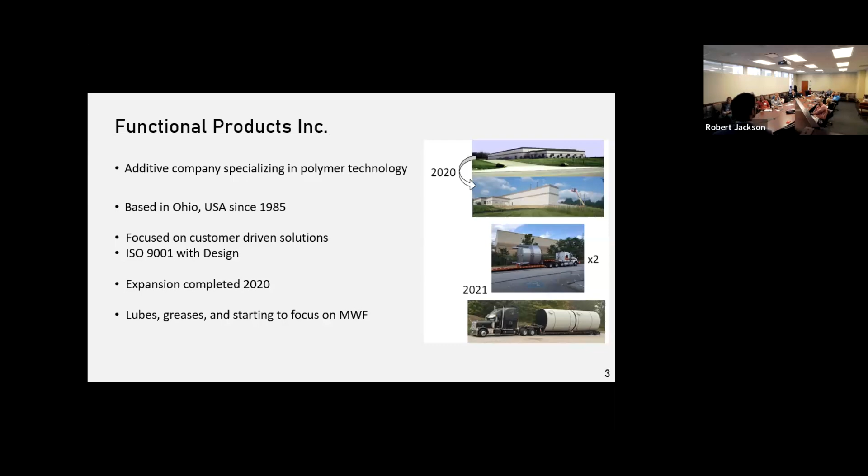So my career: when you go to a conference like ILMA and you have networking discussions, one of the big questions is how did you get into this? Auburn, as we've established, is the only tribology minor, the only place where you can really go and study tribology and have a reason for being in lubricants. A lot of people end up in this industry from family businesses, from happenstance. They have an interest in material science, and then it brings them in. One day they're working at a lubricant company.

My background is chemistry, bachelor's in chemistry out of the University of Connecticut, with a focus in polymer science, not even a minor, just a few extra classes. I really had an interest in polymers even before, so I've taken that everywhere I've gone. I used to research biodegradable plastics, how to overcome some of the problems with biodegradable plastics. They melt too easily, you can't make a coffee cup. So I was making some modifications there.

I did a lot of research experience for undergraduates, REU programs. I can't recommend those enough. I did 2 of them, one at UMass for gold nanoparticle detectors, cysteine functionalized gold nanoparticles to detect milk poison. People were doping milk, and it was causing a lot of incidents out in Asia. And then I've also done things like fuel cell research.

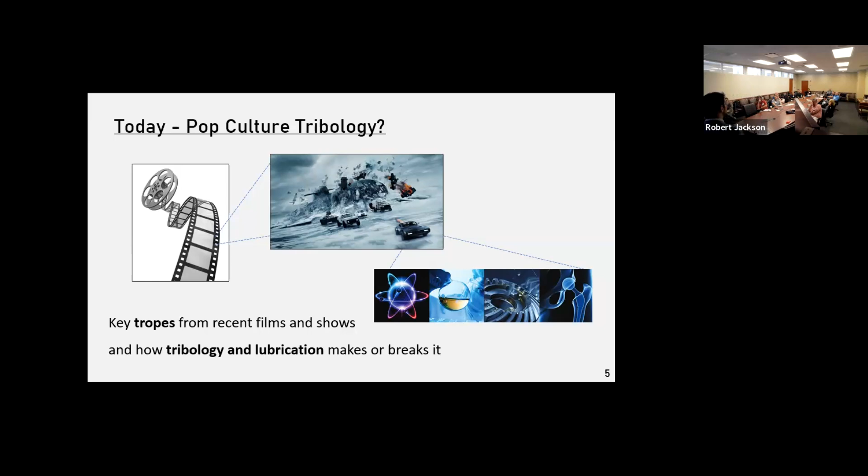Let's talk about STEM. As far as attracting people to majors, we've got these great blockbuster, major motion picture movies. Oppenheimer's got the nuclear physics going on. Hidden Figures was a great work about the math behind the spaceship launches. Interstellar, playing with astrophysics and computers. But where's our tribology movie? When Dr. Jackson gets a biopic, sometime in the future, potentially that could be our movie that gets people excited.

But tribology is everywhere. Tribology is part of a lot of stunts, like here's Jackie Chan sliding down a building. And then in some of the animated pictures, you have the new relaunch of Spider-Man, Into the Spider-Verse, a lot of that biomimicry that allows Spider-Man to walk on walls. And then you have your classic stick-slip phenomenon, your moody cello music, featured in shows like Wednesday.

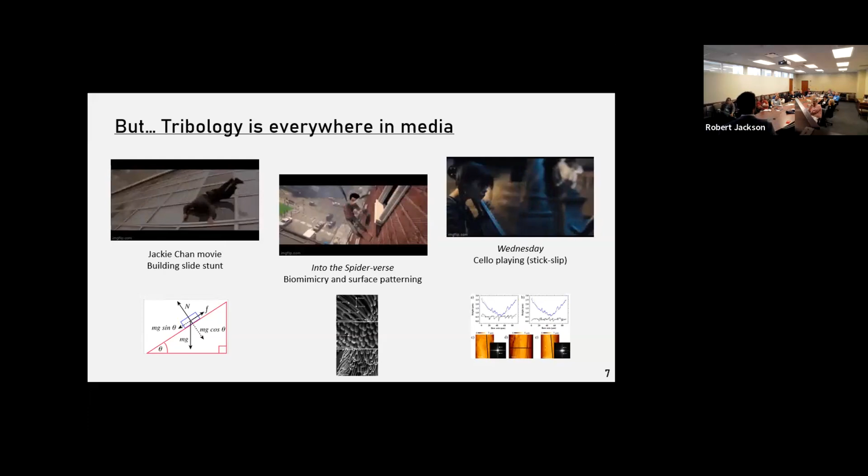So tribology, when you're creating a piece of media, is part of our everyday experience. And if you are able to successfully incorporate our expectations for tribology, how things move and slide, you have something that just reaches out and grabs people a bit more.

So I picked 3 things to talk about today that, in the COVID era, were pretty big hits for people. Things that could bring in an audience of people who are not really familiar with tribology. How do we get them interested? What is tribology? How does it affect the things that they like or think are interesting? So Fast and the Furious, we're going to talk about Cyberpunk, this new IP and sci-fi genre, and then we'll talk a bit about Forged in Fire and metalworking fluids, specifically quench oils.

Okay, so Fast and Furious. Growing up, I did a lot of work on cars, which created this whole trajectory that really drove me to lubrication. I really liked taking cars apart. I drove a manual Ford Bronco 2, took the whole thing apart, put it back together again. And that experience has always stuck with me.

So the premise is fast cars, human and machine working together to get high thrills, high speeds. And it's really a very American phenomenon, this whole car culture. Muscle cars, as far back as American Graffiti. Fast and the Furious is a great example, one of the biggest movie franchises. And then recent pictures like Ford versus Ferrari, where we even have an international clash of Ferrari and Ford, so US versus Italy. But what you see is people don't change their oil. They might be working on tires, they might open an engine bay, but nobody's really changing the lubricant.

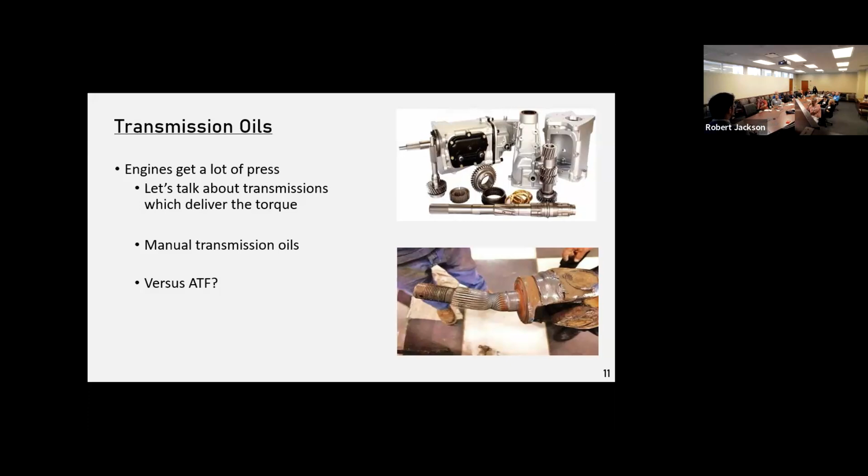But essentially what I'm going to establish is if you go to the auto store and you look at all these different oils, this is going to be a brief primer on what's the difference between a GL4 and a GL5 and all these different fluids you can put into the drivetrain.

And as we keep going up in GL number, we're going to have more and more EP load carrying properties. GL4 is where we start to get to the fast cars area. This is where we're using slightly active sulfur, some inactive sulfur, sulfurized fats, polysulfides and things, but definitely passivated. GL5 is where we're going to have the severe duty automotive gear oils. These are going to be your hypoid differentials, so really high torque for fast takeoff. And these are going to use the most severe aggressive sulfur species that you can.

In some cases like worm gear, where it's a yellow metal that can be easily attacked by sulfur, you're going to want sulfur free. So if a customer comes in and wants something designed to a certain GL level or application, this is a good primer. And then MT1 is going to be less passenger car, but more your big buses, public transportation type vehicles. It's essentially going to be this heavy duty GL5 performance, but you're going to have to do it with a very mild GL4 type of chemistry. So big treat rates to make up for that. And we supply different packages that meet all these different levels.

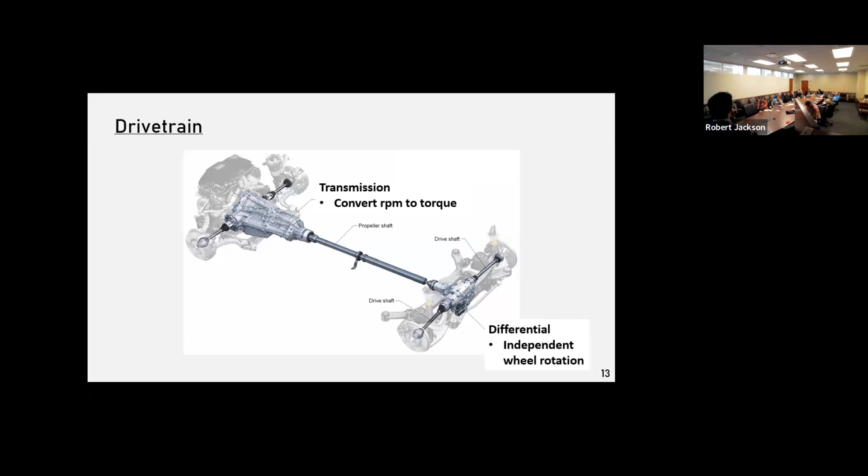Manual transmissions in racing cars, this is a Muncie 4-speed. Manual transmissions typically use yellow metal a lot. In order to make smoother shifting in a manual transmission, there are these brass rings that float between the gears, and these help you seat much easier when you're shifting manually. So you don't want that aggressive GL5 sulfur species in there. You're going to go with the GL4 in a manual transmission, unless it doesn't have these synchronizing or synchromesh rings.

In a differential, it's going to be that spider gear set, mostly stainless steel. There you're going to be using that GL4, or up to a GL5 type of chemistry. So that's a big thing: some people think they can take a GL5, with that aggressive sulfur, high EP load carrying property from the differential, and put it into the manual transmission, and you're going to have a bad time. It's going to eat through that copper.

So for the mechanical engineers, if you're designing, the lubrication engineer and the mechanical engineer have to work in sync. You have to know what's going to be in the bill of materials for the lube. You have to know what's going to be in the bill of materials for the gearbox.

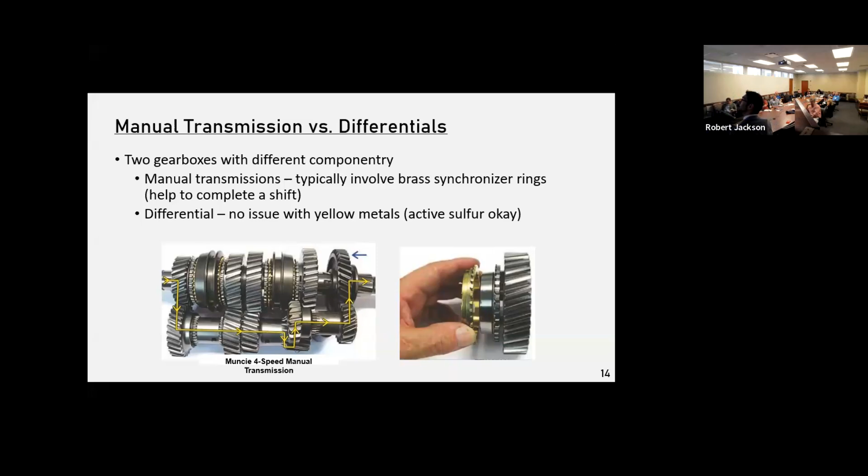And then GL4, GL5. So kind of a summary. GL4 is going to be probably used in most of your passenger cars, your sedans, your economy vehicles. GL4 is kind of rated for a spiral bevel gear set in your differential. So that's going to be a bit more compact, so it fits better into a sedan.

A GL5 is going to be in your really high torque differentials in the back of the vehicle. You're going to see a hypoid gear set more in an SUV or a higher ride, because that hypoid gear set, where it's offset, takes up more space.

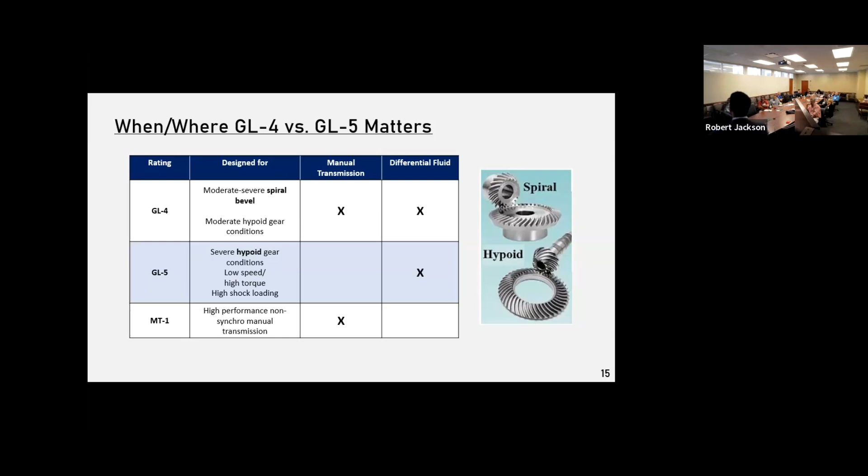So it's very simple, just going to the store, if you're an engine builder or a drivetrain builder, picking up a bottle of oil. If you pick up the wrong one, you could really fry your mechanical parts. And then MT1 is just a manual transmission, but it's built to that high performance GL5 spec.

Automatic transmission fluids are kind of a different animal altogether. So there's a lot of confusion. You build them completely differently. They're almost like a motor oil. You've got things like a wet clutch. So when you're shifting in the automatic transmission, or it's shifting by itself, you have to disengage the clutch. The clutch is made out of paper, fiber, and ceramic, essentially kind of like a sandpaper and metal sandwich.

And you have to make sure that your fluid meets the proper friction and slip parameters, or your clutch is not going to engage properly. So ATF, compared to manual transmission formulating, is almost like brain surgery, I would say.

It's very intricate, and you can see just the amount of small channels in the valves that drive an ATF system. And this valve body on the right here is going to be on the bottom of the transmission, and it's going to be actuating all of your gears.

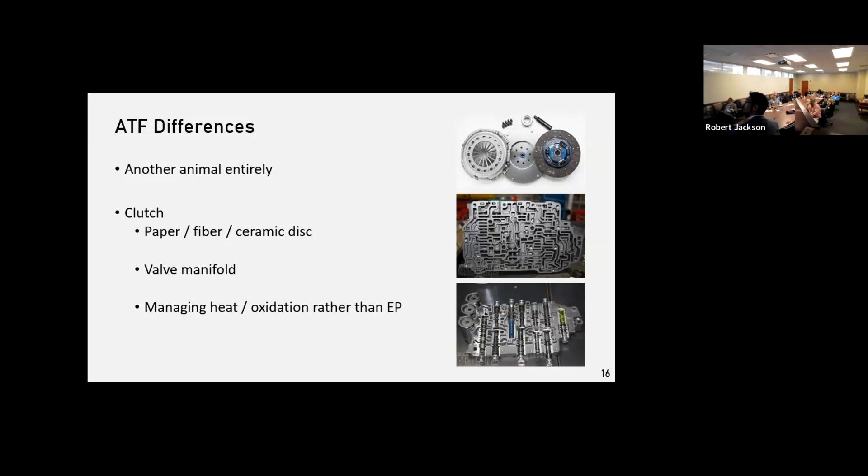Here's where we start to get into some of the business end of formulating: I could probably tell you everything that's in a manual transmission oil. But an ATF is really a packaged deal where there's a lot of chemistry involved. Over time, to keep up with fuel economy and CAFE regulations, where you're actually charged as an auto manufacturer if you don't meet this rising tide of fuel efficiencies,

the trend has been lower viscosity fluids, higher speeds, higher efficiency. But what that's done is create, in combination with that wet clutch, really complex testing. What happens is big ADCOs tend to package a lot of things together. So it's a bit more of a black box: if you're an ATF blender, you're typically taking the package that the ADCO gives you, and then you're blending that in at 10 or 15%.

So it's something that is above our scale to provide ATF, because it's so dialed into the clutch testing, all the complexities of that. But what I can say is, over time, it started out with Dex2 as sort of an engine oil spec, higher viscosities, almost like an engine oil. It needs the dispersancy to survive the heat that a clutch throws out.

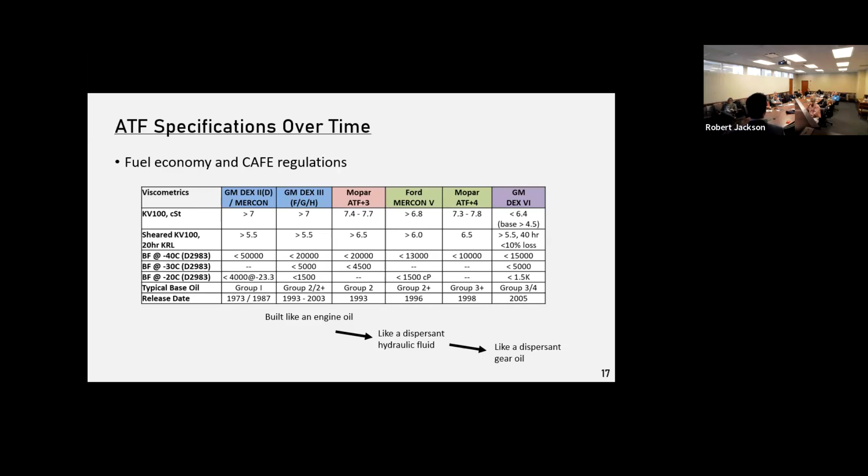And then the future of automotive. So I think EV lubrication, as mysterious as it might seem, follows this ATF trend where it's just more aggressive environments, lower operating viscosities for the fluid, and tighter and tighter tolerances on the machining.

So expect, with the SAE J3200 specification that's in development, 15,000 RPM in an electric motor that's going to replace your ATF, your automatic transmission. It's going to be operating at 150 degrees Celsius, so extreme heat and extreme speeds. And we don't quite know what the nature of the lubricant will be.

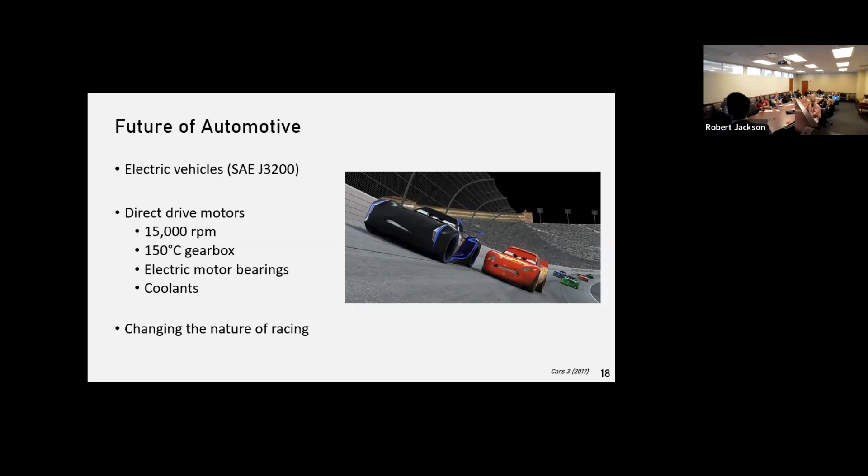Like I said, ATF has evolved over time from a motor oil to a hydraulic fluid to a gear oil. I think EV fluid is going to look more like a base oil almost, with just additives. But it may end up being something more like a coolant, as we have to dissipate all the heat of the electric vehicles.

Okay, so we're going to dip in now to some biotribology. So this is really outside the area of, I'm not a biotribologist. I think this is a great opportunity for the tribology minor, getting the biomed people involved because they're highly competitive. So where you've got mechanical engineers just looking to get a job, you've got these pre-meds and such really looking to distinguish themselves. So I think that could be a big opportunity for the future of the industry.

So Cyberpunk is kind of, you can think of the Matrix, but instead of connecting to the internet and all of that, it's more centered around biotechnology. So this has been a big Netflix show during the COVID era, pretty popular. There's some games and some movies and things. But it really revolves around prosthetics or cybernetics. And the premise of the TV show is you can go in, it's almost like a tattoo parlor, and get augmentations or prosthetics, and now you've got superhuman strength and things.

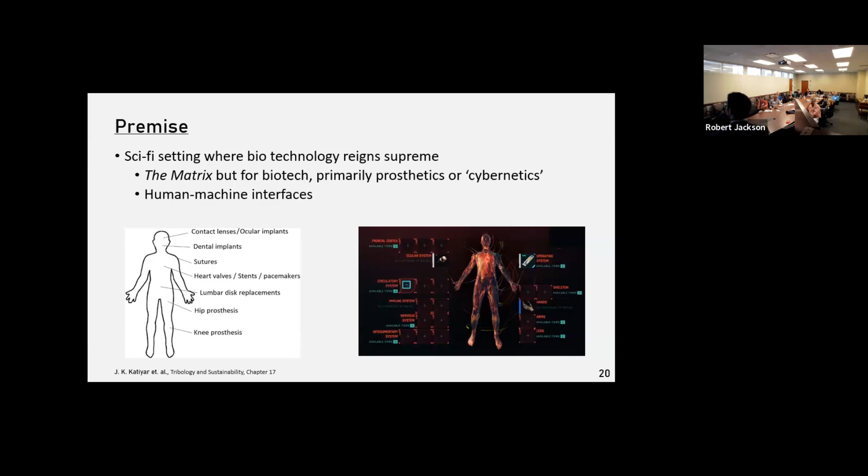Why I highlight this is to call out certain tropes in this type of sci-fi arena, that with shows like this where you've got high-tech materials, there's a lot of hand waving. So my background is really material science, that whole polymer background. So people just say, oh, it's a polymer, it's an alloy, it's a ceramic, and that's what makes it work. So spy movies, science fiction, things like Blade Runner and the Cyberpunk show.

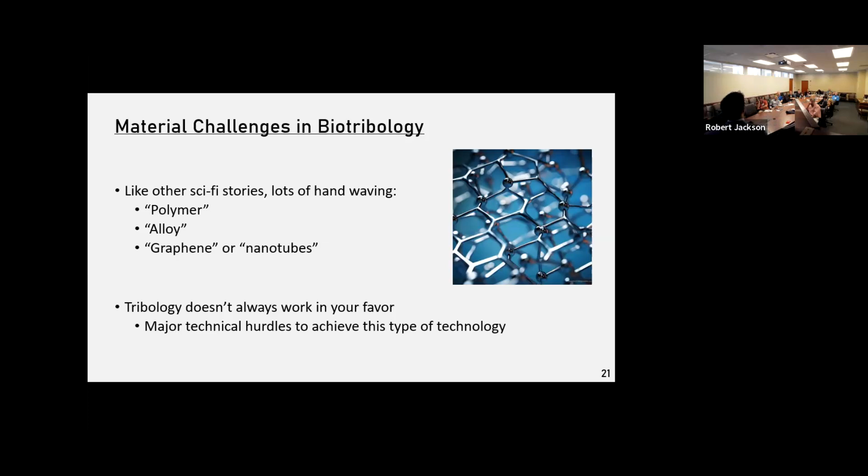And I think there's still some hurdles in that application. When you're a material scientist, you have to figure out there's always limitations, and just by virtue of something being a polymer or an alloy, it doesn't make it high performance or special. It's really about the material and the application selection. So you've got different materials and different challenges.

So in the prosthetic hip and joint replacements, you've got really three areas. You've got polymers, traditionally ultra high molecular weight polyethylene, metals like titanium and titanium alloys or surface treated titaniums, and then ceramics, things like hydroxyapatite that can mimic the natural structure of bone or bone marrow, and you can implant cells into. What's important to note about these three regimes of materials is that they have different roughnesses or tolerances that you can machine them to.

So polymers are typically cheaper or easier to manipulate because they're softer, but your roughness is going to be on the 1 to 10 micron level. So you're probably going to be operating in boundary lubrication conditions. So that's a pretty aggressive environment for a soft material. You can have a lot of wear, even though you've got this really slippery, cohesive polymer system. It can break down, form a lot of wear particles, and cause issues. So there's problems with the magic polymer that some of these sci-fi shows use.

Alloys also aren't perfect. They can be machined to tighter tolerances. So we're operating now in that 1 to 3 lambda, the mixed lubrication, getting to lower friction. But you have problems with biocompatibility. Titanium might be compounded with things like chromium, molybdenum, and you don't want those heavy metals to leach out. So there's problems with these magic alloys that certain shows profess are the answer to everything.

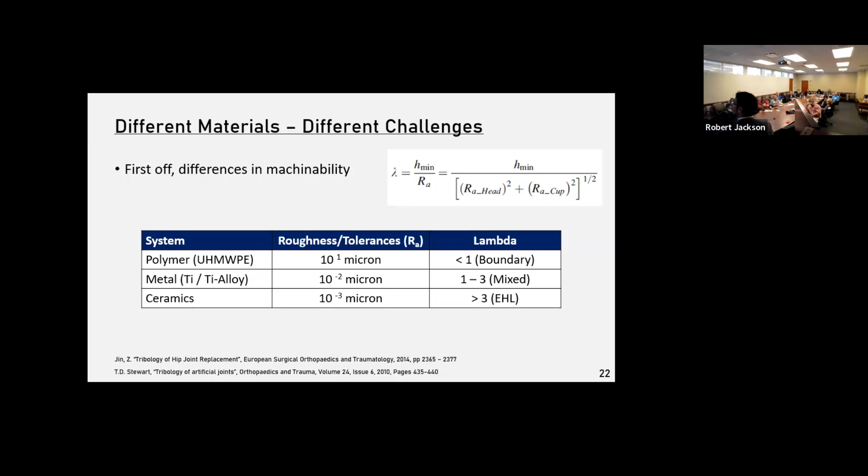And ceramics can be polished down to an order of magnitude finer, so 10 to the -3 microns. And you're talking the EHL, elastohydrodynamic lubrication regime. So very low friction, but you have problems with now a very tough, rigid ceramic that doesn't quite mesh with the modulus or the toughness of the surrounding tissues. So even though something's a composite or an alloy, doesn't make it special. It doesn't really overcome the vulnerabilities or the inherent drawbacks to some of these.

So as I've said, I'm a specialist in polymers. I'm going to try and solve the biotribology problem with polymers. There's always something that you're working against. Especially with polymers, they tend to have issues with extrusion. So ultra high molecular weight polymers, PTFE, the reason they're so slippery is because there's very low cohesion between those joints. So you could think of it almost like long-term extrusion of an O-ring. You clamp down a PTFE O-ring, it extrudes out, fills the space, creates a seal. But in a joint or a hip area under repeated compressions, that polymer can creep or extrude.

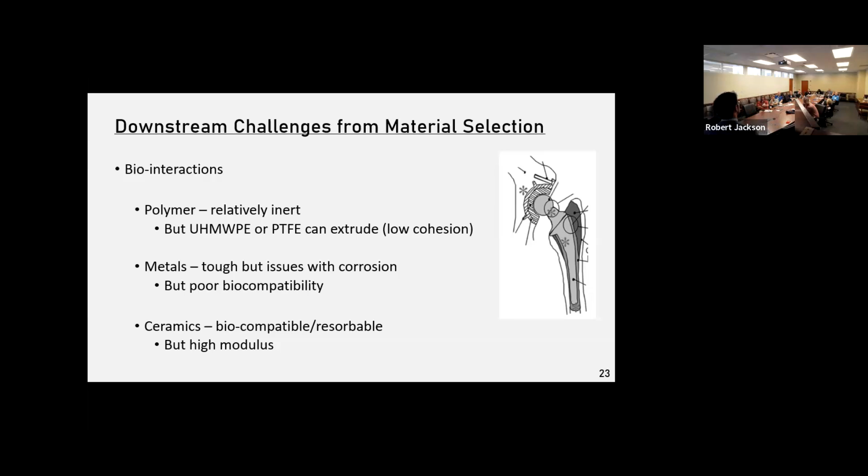So my background's in polymers, and it's as much knowing about the limitations of polymers as it is where you would use them. And then metals and ceramics, as I've said before, they're tougher materials, but you're always working against some magic material. And that's really what I wanted to highlight in this section. This high-tech fantasy, 100 years in the future, we're still dealing with the same physics that we have now.

So to summarize this section, this is a little bit of a kind of intermission between my next favorite part. I always think of things as a material scientist, it's kind of what I've evolved into over time, is the processing. So like that roughness, what surface roughness do you get from these different materials? The structure, so how does the cleaning, the polishing of these different materials that you've chosen through

the tribology, how does that affect things like the lambda, the lubrication regime, and then how does it affect downstream issues, complexities, repeated impact? Are you using it somewhere that takes on a lot of load, like a hip or a knee, or something like an elbow? So it's very contextual. There's no magic material. So something to think about in your material selection.

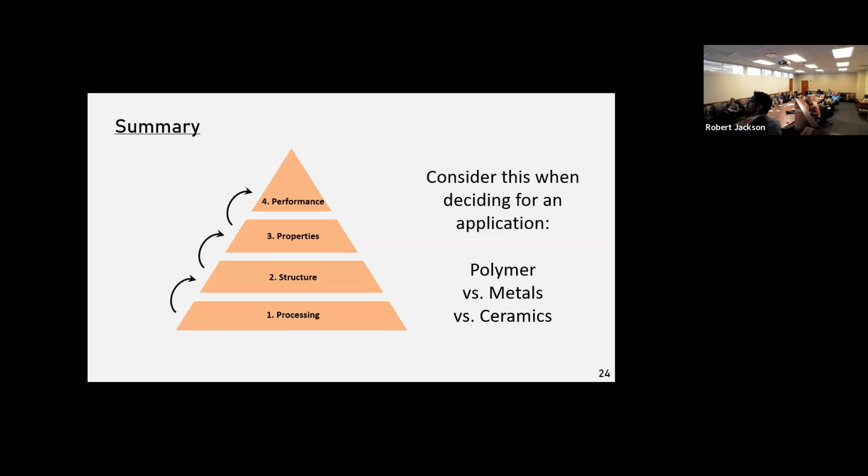Okay, and then the last section is Forged in Fire. So this has been a real big passion project for me. I'm going to talk a bit about specifically one area of research that I've really ridden one of my lab people over, but he's done I think a fantastic job. So we're going to talk about Forged in Fire. This is a really popular show.

Essentially think of it as Chopped or Great British Baking Show for historical and cultural weapons. To demonstrate the competitive skill of these bladesmiths, they're going to remake a saber or a war axe or something. And they have to take an ingot of material, hammer it out to bright glowing red, they hammer it, they treat it, and then they do things like quenching, tempering, all these

metal transformations. What I find is a good opportunity to talk about is quench oils. So quenching the sword or the spear or whatever they're making is always this big dramatic moment in the show. So if you like big dramatic moments like this and you want to turn that into a career, something like quench oils could be a good gateway.

So I'm going to talk a bit about formulating. And then because we're talking about lubricants that are going to be in high temperature areas, I'm going to use the last bit of this talk to talk about fire resistant lubricants and how do we engineer for more safety. And maybe if your mechanical system is in proximity to fire or open flame or high arcs, you want to go away from petroleum or hydrocarbons to something a little more safe. So kind of a big cut.

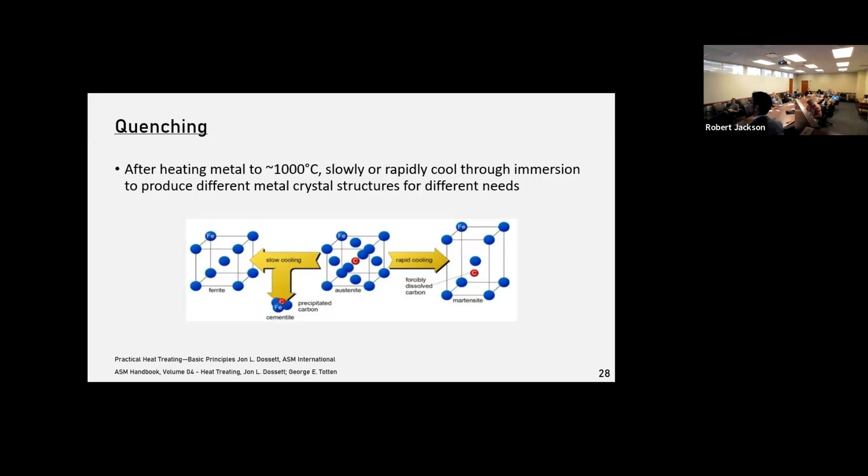So depending on the purpose of the forged item, it could be one of these weapons they're making, it could be rebar, part of a drivetrain, how quickly you quench that hot piece of metal determines whether you get the ferrite structure, which is very hard, has good sharpening ability, a good ability to take an edge, versus rapid cooling, you get something with greater tensile strength. So how quickly you achieve that cooling affects the final properties of the material, even though it's the same number of atoms with the same stoichiometry of carbon and iron. It's different.

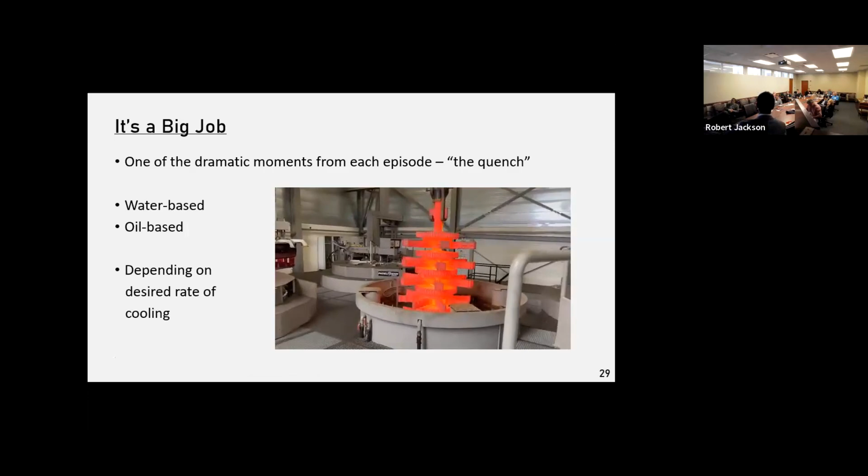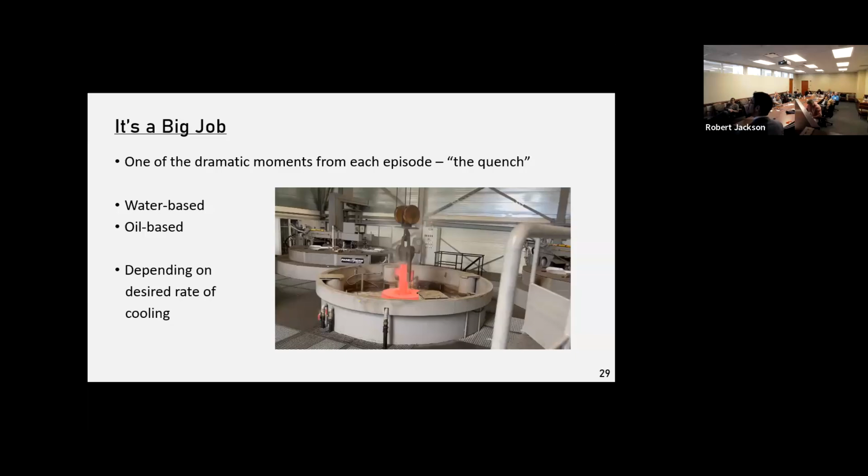So it is a big job. It's done on claymores and swords and all sorts, but it's also done on giant industrial scale as well. So we want to make sure that we preserve the integrity of the materials and that we quench slow enough or fast enough to meet the desired tensile strength and hardness of that material. There's a lot of options out there. There's water-based or oil-based. We focus primarily on oil-based just because it's kind of a new area for us, these quench oils. We're offering quench oil packages. And water-based is probably the next phase for us. It just has some of its own complexities.

Okay, so quench oil. The way you can measure quench oil performance, there's two main tests. There's the GM quenchometer test. This is a really cool test where you heat a nickel ball up to about 850 degrees Celsius and then drop it into your quench oil. The interesting thing about nickel is when it gets to about, I think about 600 degrees, it becomes magnetic again. So you go above the Curie point, the nickel ball cannot be magnetized or has no magnetic attraction.

You almost use the magnetism of this ball as a thermocouple or a probe. So once it reaches 600 degrees Celsius or below the Curie point, it swings over and hits a magnet and makes a clink, and then you can measure how quickly it went from 850 Celsius to 600. And that gives you a basic cooling rate. You can stack that up against how fast or slow you want to quench your workpiece.

Then you can go to the Quenchalyzer. It takes more sample, it's a little more expensive, but this can actually get you instantaneous cooling rates at specific temperatures as well. So if you're a metallurgist, there's a lot more to talk about. But we also look at coking, oxidation, and surface finish. So when you retrieve this piece of metal, you don't want it to be covered in charcoal or burnt up or rusted. We want to make sure that we preserve this metal, even though it's gone through about 1,000 degrees of temperature change.

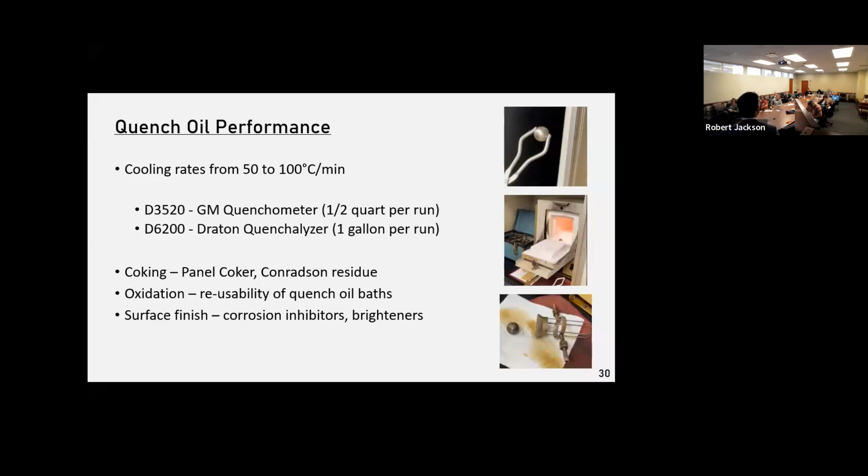Something that we look at on the surface level, the surface science, is you have to think of the thermal conductivity. Initially you think it's very easy, you just stick this hot piece of metal into oil or water, and then it just gives off all this heat. But there's a lot of surface chemistry involved. So if we've got this hot metal surface and the quench oil is kind of stealing the heat away, what's going to happen is that quench oil is going to pyrolyze. It's going to turn into carbon deposits, and those can be insulating.

We can have the petroleum oil spontaneously flash vaporize, and it's forming a gas or vapor barrier. And then we can have inorganic components of the quench oil decompose into oxides, which tends to be most favorable. So the level of atoms we put into the quench oil generates three different kinds of regimes of surfaces. We've got a carbon layer or a char layer, which could be very dense and actually thermally conductive, or it could be quite insulating, almost like an aerogel. The vapor is quite unfavorable.

So what we want is sort of an oxide layer. We have certain inorganic metal species in the quench oil, and they decompose into, rather than this carbon, a very dense, nice oxide layer that transfers heat, not as rapidly as the metal, but much faster than a carbon aerogel or a vapor barrier layer. So we can control that with things like detergents, surface active materials. And then we also want to make sure that we have good oxidative stability, so we can do the whole process all over again.

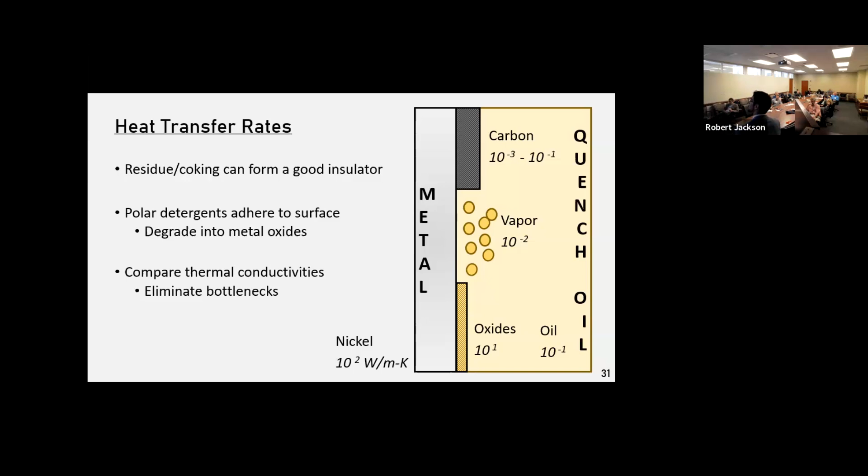Last piece is fire-resistant hydraulic fluids or fire-resistant industrial fluids as well. So the whole COVID era was marked by a lot of thermal events, as my plant manager calls it.

You don't say the F word. It's like saying Macbeth on the stage.

But hydraulic systems, they do two things. They transmit power. You can use them in power hammers to forge giant axles or propellers for boat shafts and things. The second thing they do is leak. So in hydraulic systems, the elastomer is going to fail, a seal is going to fail. Someone might run over it with a forklift, and it's going to spray. And if that spray hits something like an ignition source, it's going to turn into a flamethrower.

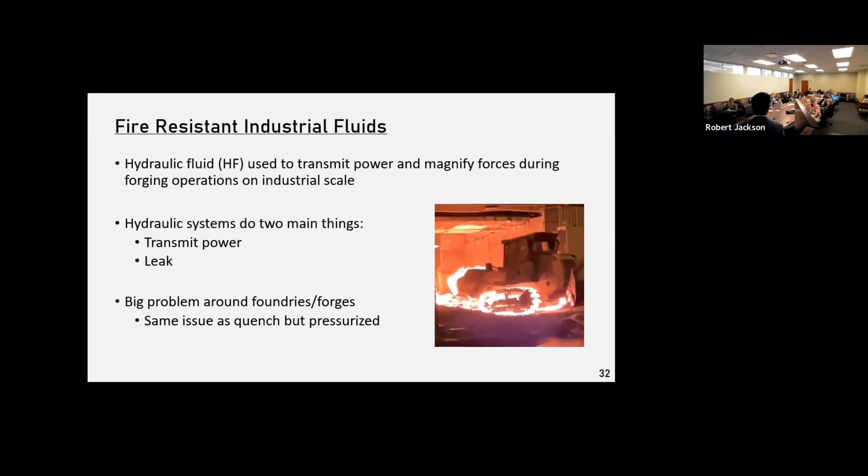So it's a big problem, especially if I've got this great big vat of quench oils. I don't want to cause all sorts of thermal events. One of the big things is Factory Mutual. This is a program that certifies the flammability of lubricants in industrial settings. So you want to make sure your warehouse is properly insured. The lubricants that drive your equipment, especially in foundries and things, they have to be Factory Mutual assured.

Nice thing to note is if you're going to get a Factory Mutual approval, if you're a blender, I think it's in good form to inform your additive supplier as well. Because once you've approved a formula, it's locked in. They will watch you make a batch. They will seal it up, take it to the Factory Mutual test lab and test it.

The 4 parameters they test for are heat of combustion, the density, the critical heat flux, which is essentially the transition from liquid to gas. So does it evaporate faster than it vaporizes, kind of. And mass flow, so misting capability. And then they generate this SFP number. If you're above 5 times 10 to the 4th, you fail. If you're below 5 times 10 to the 4th, you pass.

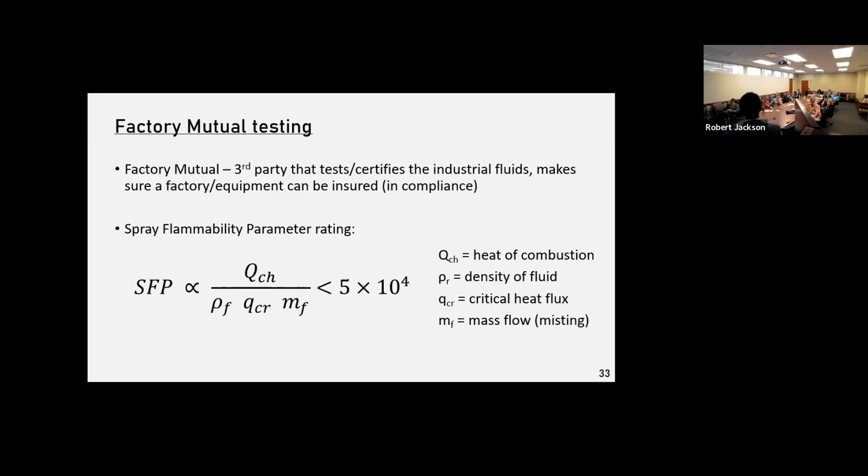Your ability to form a flame that will be sustained by a spraying leak is minimal. So you're safe. There's a lot of ways to beat the test. Typically, you're looking at higher flash points, more importantly, higher fire points. So at what temperature does that base fluid catch on fire? I tend to say base fluid because we've maybe gone from petroleum to synthetic esters, to PAGs.

You can also lower the misting by adding things like polymers, viscosity modifiers, anti-misting agents. Here's some real basic spray testing we did with 0.01% of the polymer. It changes completely the spray pattern from a spray, high surface area, high combustibility, to a jet. And then the last piece is self-extinguishing thermodynamics, so phosphate esters.

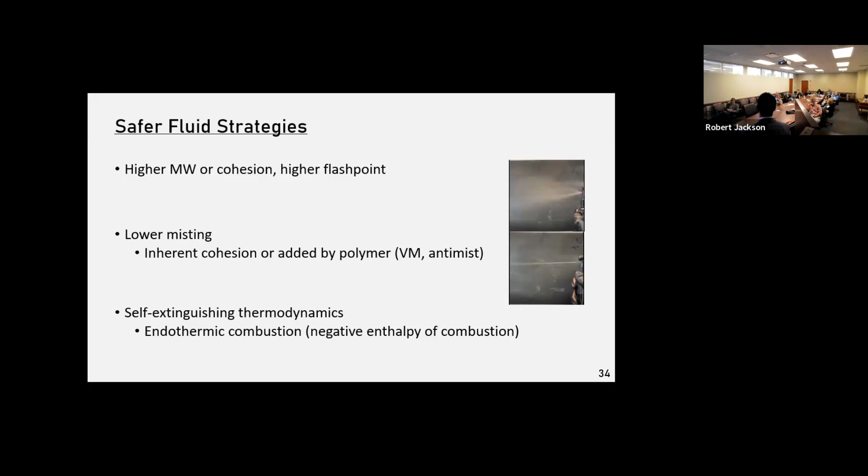I'm not a big fan of them, but the energy it takes to combust the phosphate ester, it consumes essentially more energy than it takes to burn. Rather than, when you burn a candle, it puts out more energy and it kind of sustains itself. Phosphate esters almost have like a negative enthalpy of combustion, so they are self-extinguishing.

So to show you some chemical structures, most popular is water glycol. Typically, if you use 60% water, you might automatically pass, but there's a lot of issues with having water. You've got to worry about the effects of microbes and things. That's become a big workplace issue, people being exposed to microbes growing in the water.

You can use polyol esters, even vegetable oils, polyalkylene glycols, or as I said, phosphate esters. These all have better cohesion, lower volatility, higher fire points, and they have tended to be safer to work around. So you want to make sure if you're speccing out a lubricant. There's a company I'm pretty close with where they had this big piece of equipment in a foundry, let's say it's like a power hammer. So it's just a big hammer that rounds out a giant square ingot into a drive shaft for a big piece of equipment.

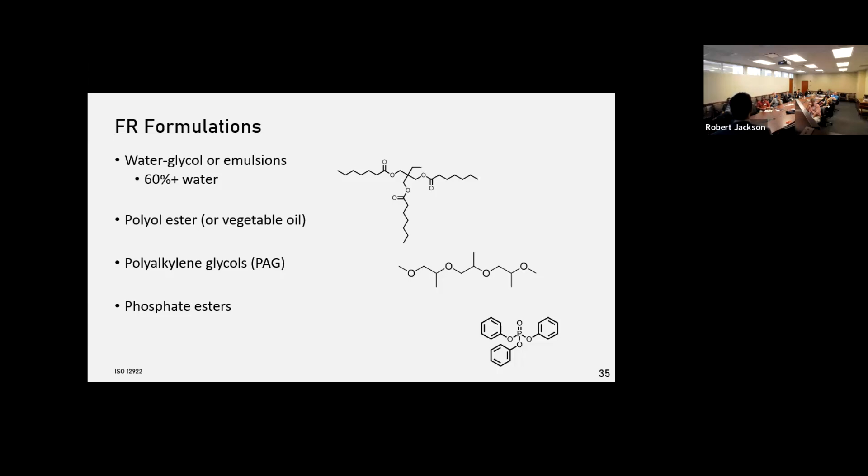It was a European OEM that made the power hammer, and they only spec'd in mineral oil. They wouldn't warranty or do anything with this piece of equipment if they changed it to a proper fire-resistant hydraulic fluid. And I said, you guys got to change this. You got to strong arm this OEM, the equipment manufacturer. And what happened is the hydraulic fluid sprung a leak, shot into an ignition source, and it burned down the factory that was the core of this whole business, this giant metalworking facility. So that's kind of part of the education that proper lubrication recommendations have to factor in.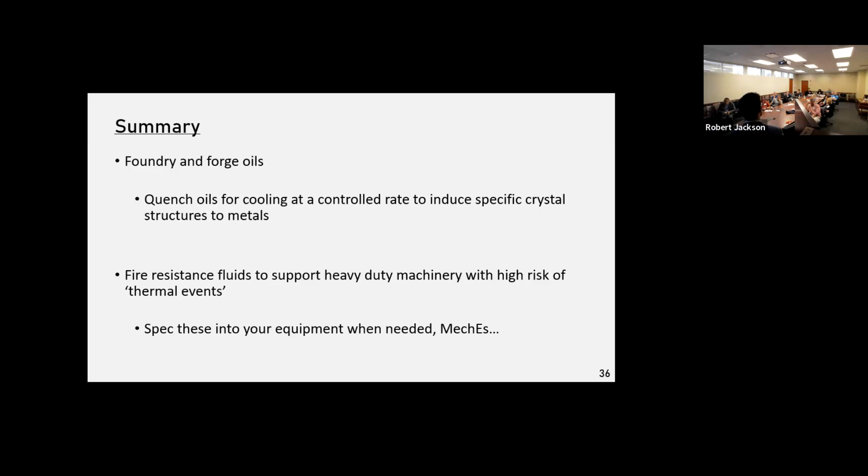So foundry lubricants, very high intensity, a lot of dramatic elements to it. So if you host a blacksmithing session and then show people there's a lot to lubrication, especially at these extreme ends, this Forged in Fire show has kind of become a real cult phenomenon. And be safe. You can design safety into not just the safety factors of your mechanical systems, but also safety factors into your lubricants. So it's a big field.

I've covered a lot. In grad school, I was kind of the short order cook, the guy who did all the different little projects, and I like to cover a lot of things, maybe at a pretty thin level, but it's a big field. There's a lot to talk about, and everyone you meet's doing something different. And a lot of people I've talked to in the industry at ILMA, STLE, never even thought about this. This little piece of equipment, this assembly system needs a special lube. So there's a lot of depth.

So pop culture tribology. How do you get younger people excited? People don't change their oil anymore. We've become kind of distanced from oil maintenance. You used to grease your car, you used to change your oil, you'd make your kids do that. And now you just go to a Jiffy Lube or something. And so we've distanced ourselves away from getting your hands dirty.

So we move from hands to eyes, we get people's attention, get associated with these big cultural phenomena that are going on. How does tribology fit into what makes those media work? How does tribology and our sense of tactile feel, our notion of physics, mesh with what we see on the big screen when we say that's a good stunt, that stunt made a lot of sense, versus, oh, that was a pretty corny stunt? So it's a big industry.